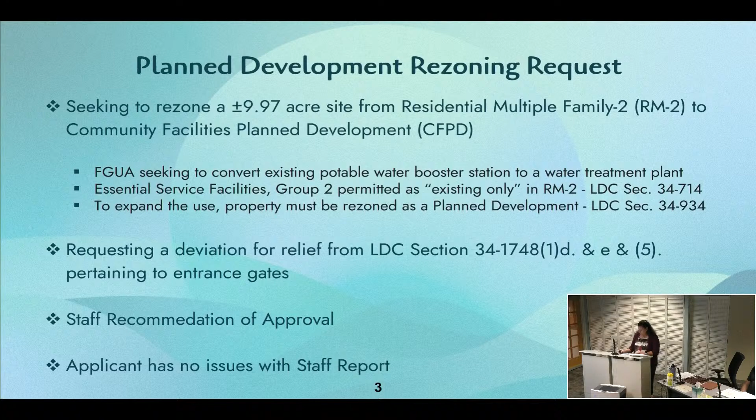A little bit of background on the applicant: the Florida Governmental Utility Authority is a special taxing district formed in 1999. Its purpose is to acquire, own, improve, and operate water and wastewater utilities. There are currently over 120,000 customers throughout 98 systems in 14 Florida counties.

Lehigh Acres is one of those service districts. It's about 95 square miles with a total of 14,000 water customers, servicing basically 50% of the area. Water treatment plant number 1, at 305 Coolidge Avenue, is the only water supply source at this time. The subject site at 913 Bolivia Drive would be water treatment plant number 2, which currently serves as a booster station and water storage facility. Over the last decade, Lee County has grown significantly, and now the FGUA must expand its water supply system to meet current needs and future 20-year demands. In addition, there are water system reliability and resiliency issues that need to be addressed with the existing water facilities.

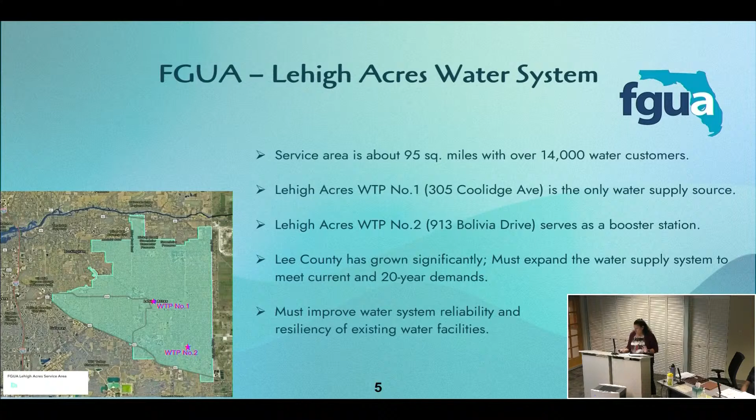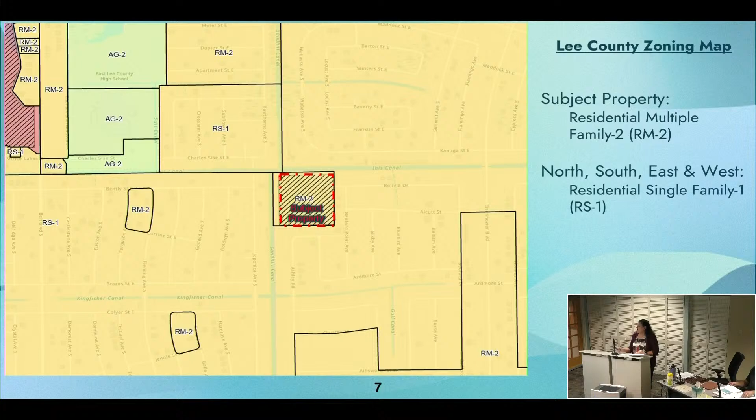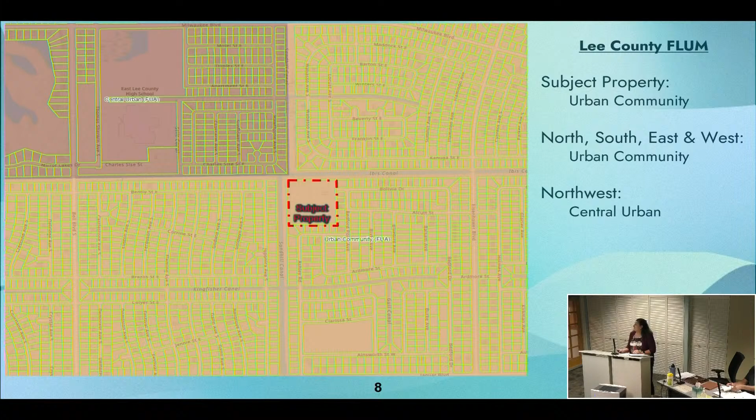This is the property, at 913 Bolivia Drive. It's just under 10 acres, located at the western terminus of Bolivia Drive, about 3 miles north of State Road 82, in the southeast section of the Lehigh Acres Planning Community near the Lee County and Hendry County border. It is currently zoned Residential Multifamily 2, and you can see all around it is RS1 on all sides. That's the current zoning, and this is the current future land use map designation. It's within Urban Community, surrounded by Urban Community on all sides, except on the northwest where it is Central Urban.

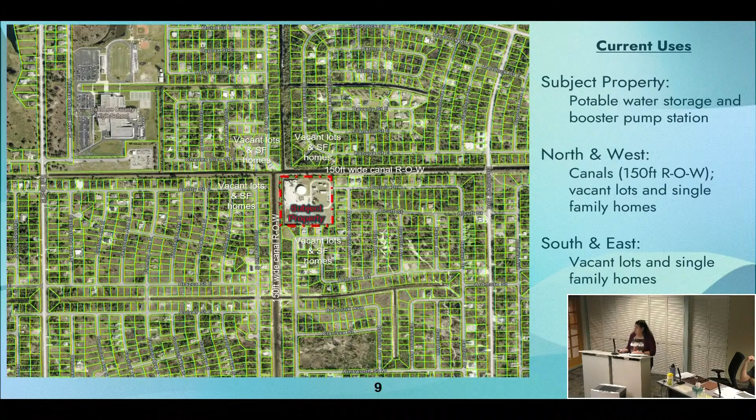As I mentioned, the subject property is currently being used as a water storage and booster pump station. To the north and west are 150-foot canals, the Ibis Canal and the Sandhill Canal. To the east and south are vacant lots with a few single-family homes on them.

A little bit of history on the site: it was originally purchased in 2002 by Florida Water Services Corp. In 2003, a special exception was approved to allow for Essential Service Facilities Group 2 in the RM2, and conditions were attached to that approval. It was for a special exception for the water treatment plant only, which had to be developed according to the site plan. There's a buffer that was required: a 30-foot wide Type F landscape buffer on the north and the west, and a 25-foot wide Type E buffer on both the south and the east, abutting the residential. They were to preserve the existing native trees outside those impact areas, remove exotics, and maintain them.

No structure other than walls could be located within 100 feet of the boundary, excluding the wells. All structures had to be painted natural colors, and there were lighting standards. If the use was discontinued for more than 5 years, the special exception would become void. So with that...

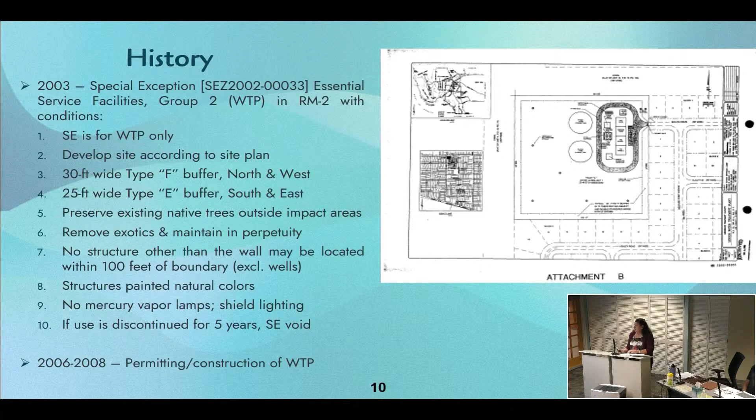Next page: FGUA purchased the lot in 2003 and was issued a development order to drill 3 shallow upper sandstone aquifer wells. Between 2006 and 2008, permitting and construction began for the water treatment plant. In 2008, they had some water quality issues and sought a special exception to include a deep injection well to improve water quality, along with a variance to allow that deep injection well within 50 feet of the perimeter of the property instead of the required 100 feet.

Again, there are conditions associated with this: complying with the existing special exception approval, developing according to the site plan, going through the deep injection well permitting process, and addressing any impacted slash pines. At that point in 2013, the deep injection well was not constructed, and due to financial constraints, the site was converted to a water booster station and water storage facility.

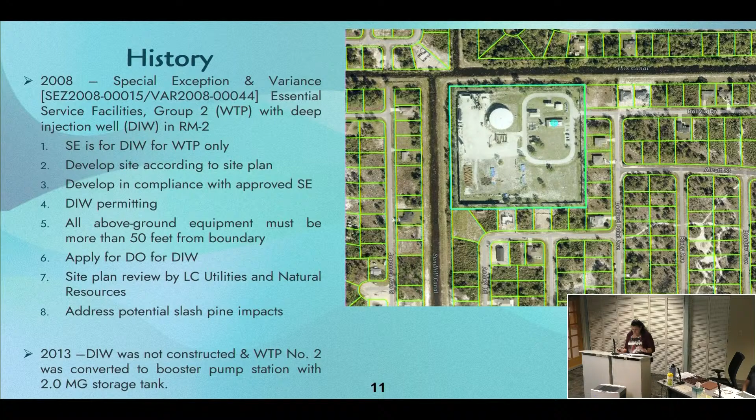That brings us to current needs. The FGUA has done a needs analysis for the water system, and based on population and water demand projections, it justifies an expansion and improvement of the existing water treatment storage facility. Their water master plan seeks to reestablish water treatment plant number 2 as a reverse osmosis system with a deep injection well and monitoring well, add administrative offices, infrastructure, piping, and raw water wells. They received some funding for that expansion from the state.

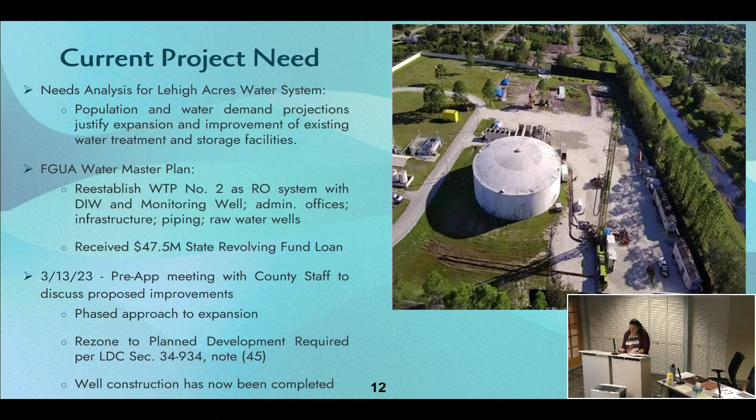In March of 2023, a pre-application meeting was held with county staff to discuss the proposed improvements, and it was determined that they needed to go through a rezoning to get the planned development district designation to do the water treatment plant. One more thing: well construction. The deep injection well has now actually been constructed, due to concurrent rezoning and development orders allowed by the land development code. It has been constructed, and they're going through testing, monitoring, and inspections now.

All right, so this is the master concept plan. There's a large version of it in your packet. The blue areas that I've highlighted are the existing areas of development, which include the booster pump station and all the equipment that had been vacated for the water treatment plant that was never fully established.

The pink would be phase 2, or the short-term proposed improvement areas, which would include recommissioning of the water treatment plant, conversion to the reverse osmosis system, some new Upper Floridan aquifer raw wells, which go deeper than the sandstone ones currently on site, and administrative offices. Phase 3 includes longer-term improvements to increase water treatment and storage capacity up to between 8 and 10 million gallons per day.

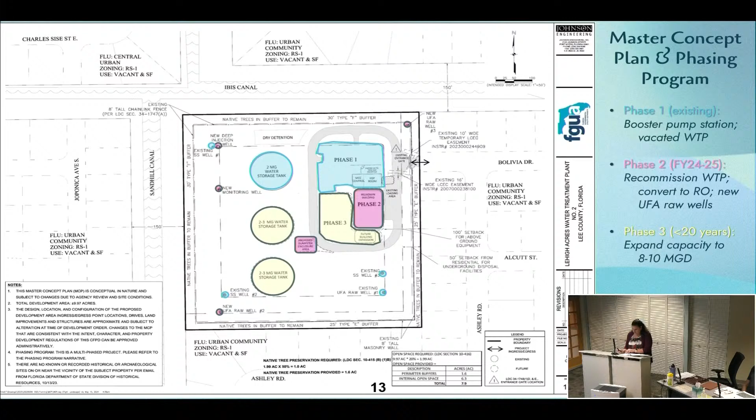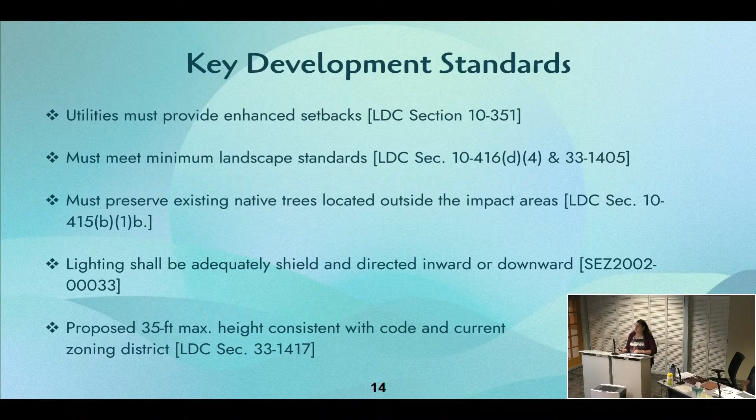This slide summarizes the key development standards regarding setbacks, landscape standards, tree preservation, lighting, and height. As you can see, these either meet Land Development Code standards or are conditioned based on prior approvals, and there's no intent to abandon those.

This shows the enhanced setbacks that are already established on the property and will still be maintained. There's a 50-foot setback requirement from residential for any underground disposal, and a 100-foot setback for any above-ground equipment.

Buffers -- yes? What is underground disposal? That would be the deep injection well, where the brine pulled out of the RO system would be put back into the underground levels of the earth.

I thought the deep injection well was in the northwest corner. It is. That's the setback requirement from the code. It's confusing because it's already set back. It's already set back way more than -- yeah, exactly. You can see it up on the top; it says new deep injection well at the top northwest corner there. Is there going to be a second deep injection well? No. All the red indicates is what the code says today, and that we are complying with it.

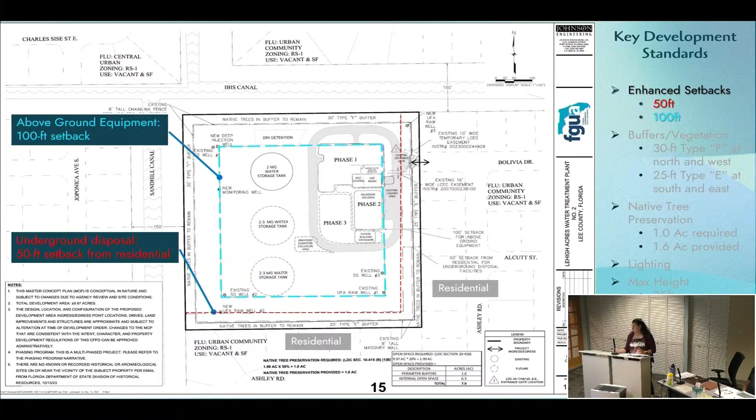This indicates the type F buffers, the 30-foot type F buffers on the north and the west, and the type E, 25-foot buffers at the south and the east. With this, an 8-foot wall was constructed on the south and east sides of the property. On the north and west is an 8-foot chain link security fence.

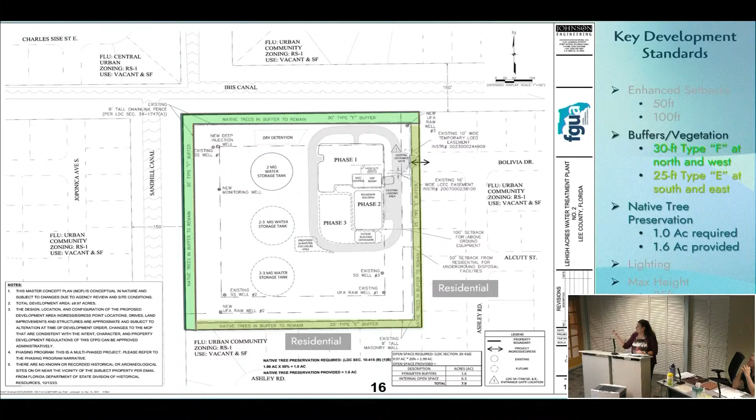Let me go back one more time -- those native trees are outside in those areas, and those exceed the requirements. Then lighting and maximum height of 35 feet: the storage tanks are the tallest structures on the site, and they're less than 35 feet. Future storage tanks that would be proposed would also be that low profile, less than 35 feet as well.

All right, so this is the deviation request. As I mentioned, that existing 8-foot wall and entrance gate is located right there at the terminus of Bolivia Drive. That was built before the code changed and has additional requirements.

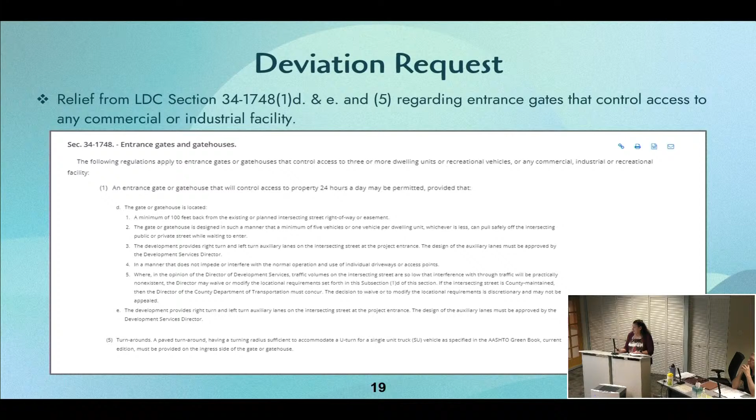Here's what those requirements are. The code requires a 100-foot setback from the right-of-way. The existing gate is 20 feet from the right-of-way. The gate should be designed for a minimum of 5 vehicles stacking, and as you can see, that's not really possible. It also calls for right and left auxiliary lanes, which the Director of Development Services can waive or modify based on low traffic volumes, and then a turnaround for a single truck is also required on the ingress side of the gate.

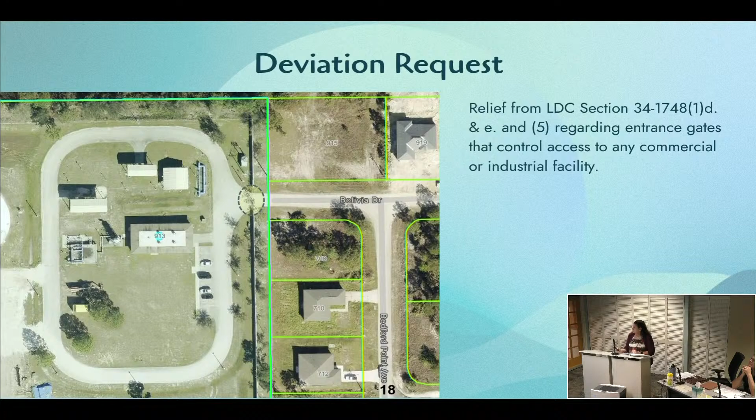So you can see it's only 20 feet from the property line. This is the existing conditions. They're not looking to change anything now, so this would be a deviation request. So they're seeking to reduce that 100-foot minimum distance to 20 feet to kind of acknowledge what's already on the ground today and continue on.

Eliminate that auxiliary lane provision based on low traffic volumes and eliminating the turnaround requirement. Right now, the only things that come in there are the people who have intention to come in there to either work inside the facility, equipment and such.

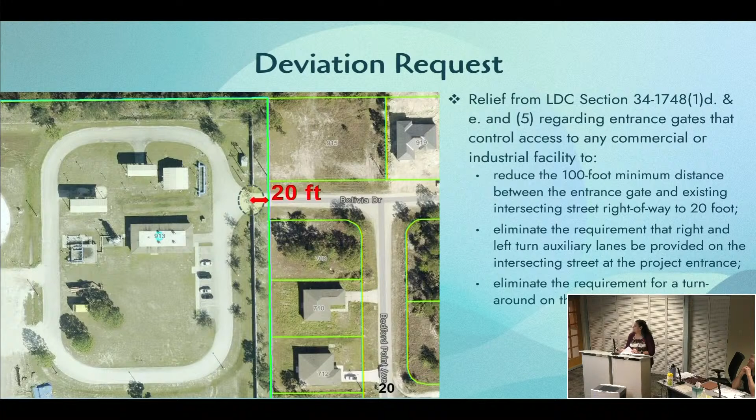And the justification, the existing site plan, the existing site design layout does not offer enough space to include these items now. And as the use generates minimal traffic and is at the terminus of Bolivia Drive, the requirements should not be needed.

The staff report indicates that staff is in support of the deviation request.

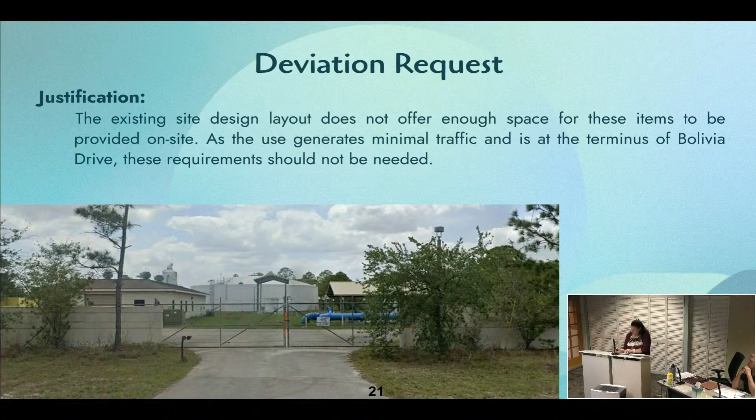And then moving into Lee Plan consistency. So we agree with staff's assessment on the applicable Lee Plan objectives and policies, and I've highlighted a few of those here. The county's vision statement states that public facilities will be maintained at adequate levels of service, partly by the construction of new facilities and partly by the use of new methods to conserve the capacity of existing facilities. This rezoning effort supports the expansion of existing public facilities to maintain adequate levels of service.

The land use category, urban, community, public and quasi-public uses are included in the list of predominant land uses for this category. It also calls for expanding and strengthening them accordingly. This rezoning promotes the expansion and strengthening of public services. Policy 2.1.3 establishes that public utilities and facilities are allowed in all land use categories when it's consistent with the GOPs and the applicable land development regulations.

And the rezoning is consistent with Policy 5.1.5 as the conditions that are attached to the site previously through the special exception approval ensure compatibility with the surrounding neighborhood.

Moving into Objective 7.1, because of the nature of the type of use that this is, it would be classified or considered industrial. The proposed improvements will comply with local, state, and federal air, water, and noise pollution standards. And although it is located next to residential development, neither the existing facility nor the proposed improvements are anticipated to generate noise levels incompatible with residential development, nor will any bulk storage or production of toxic, explosive, or hazardous materials be near residential areas. All permitting will be done in accordance with South Florida Water Management District and Lee County Development Services and would be consistent with good engineering practices, adopted environmental criteria standards, and relevant policies of the Lee Plan.

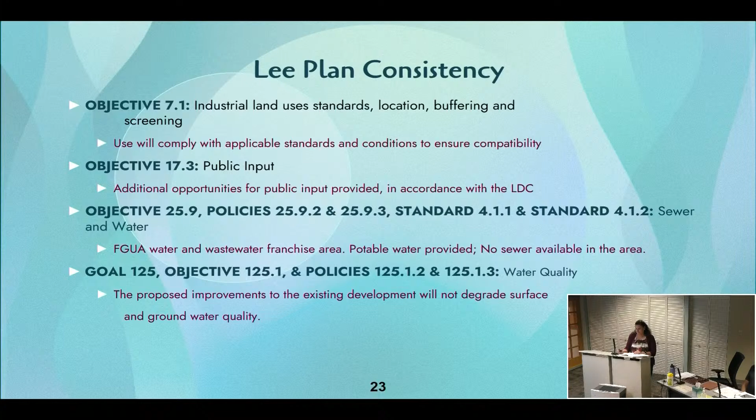All right, so then we come to the zoning criteria. In summary, as we've demonstrated, the proposed Community Facility Planned Development rezoning request will meet the criteria established in Land Development Code section 34-145 D4A for granting a rezoning, including complying with the Lee Plan and being served by existing urban services. The request meets or exceeds all performance and dimensional standards of the LDC and other applicable county regulations, with the exception of the deviation, but promotes the intent of the code regarding protection of health, safety, and general welfare of the public.

Is there a proposed limitation on the square footage of the administrative offices? I don't believe that we put a limitation on the square footage of the office in the conditions.

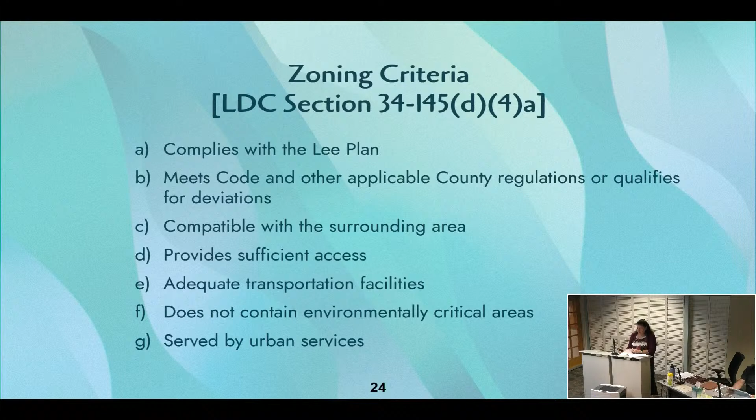The property will continue to be accessed via Bolivia Drive, as demonstrated in the provided traffic impact statement that was part of the application package. The surrounding roadway network has sufficient capacity to handle traffic from the proposed development. The site is already developed and does not contain any environmentally critical areas. Proposed improvements will protect existing environmentally critical areas and natural resources. The site is served by urban services and will enhance the availability of urban services to the surrounding facility based on the type of use that it offers.

The planned development findings: in addition, the proposed CFPD rezoning request meets the planned development findings criteria. The proposed permitted uses allow for the development of public facilities that provide necessary essential services to the surrounding community. It doesn't generate significant traffic, create adverse impacts regarding noise, lights, or odor, and is generally consistent with the surrounding area, particularly with the conditions placed on it—the wall, the landscaping, and setbacks. As previously mentioned, those conditions were imposed on the site and would continue to be applicable. The deviation enhances the achievement of the objectives of the PD and protects the public health, safety, and welfare.

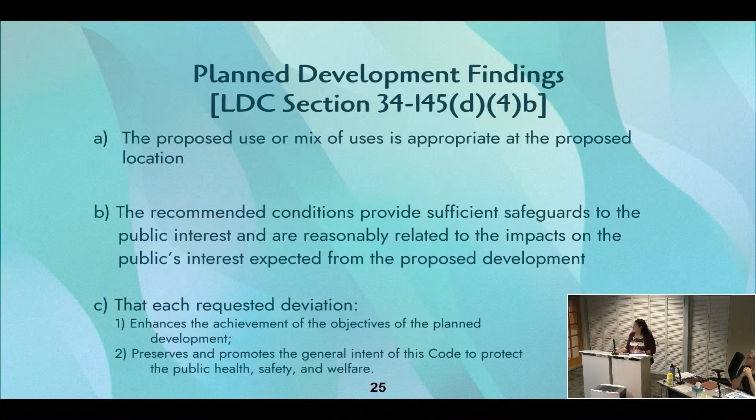Regarding public notice, I mentioned that we had a public information meeting, and that information was available in the packet as well. Signs were set up on September 16th in accordance with the administrative code sections, and I know that county staff had mailed notices to the surrounding property owners.

So in my expert opinion, the requested zoning change on the subject site from RM2 to Community Facilities Planned Development, to allow the recommission of a water treatment facility and associated uses, is appropriate in this location. It allows for the expansion of the public purpose use, supports the goals, objectives, and policies of the Lee Plan, complies with the Land Development Code criteria, and meets the applicable standards required under Chapter 33 regarding development within the Lehigh Acres planning community. The applicant and I are available to answer any questions you might have.

Thank you. I don't have any questions at the moment. I'm ready for staff's presentation.

Thank you. The PowerPoint, paper PowerPoint, will be staff exhibit 2.

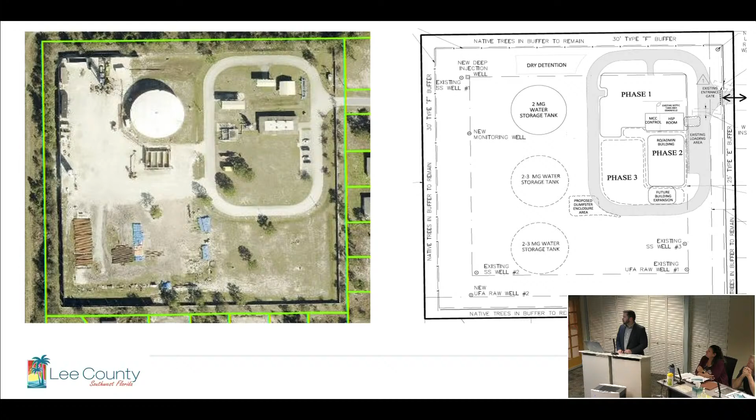The applicant has gone through the zoning history up to this point, but since 2013, this has been used as a water booster station and not as its own water treatment plant. And that's part of the reason why they weren't able to benefit from that existing only clause in the RM2 district that they were discussing, that has a defined set of dates, basically, that you have to be in existence.

I don't think they would have met the original date. I believe it's 1989 or something, that you would be able to expand as a conforming use. But even with that, the special exception expired with inactivity for 5 years, I believe is what the applicant stated. So that's why they're having to go through this case today.

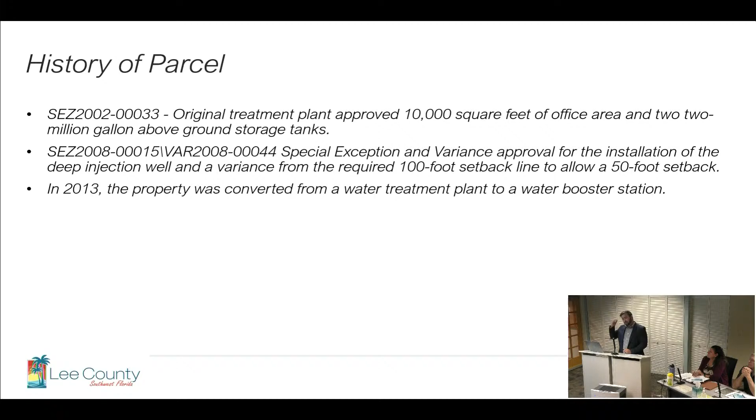The applicant has gone through the decision-making criteria, and we'll hit some of the high points through our presentation, but we do generally find that they're consistent with the decision-making criteria.

This is in the urban community future land use category, between what's already characterized as an area that would support public and quasi-public facilities. Policy 2.1.3 also expands where these utilities can be located, and so we find them consistent with the future land use category.

The proposed expansion and reinvigoration of this site is also there to facilitate objectives 2.1 and 2.2, allowing for additional urban services in the area that aren't currently available or not able to sufficiently address the growth in the area.

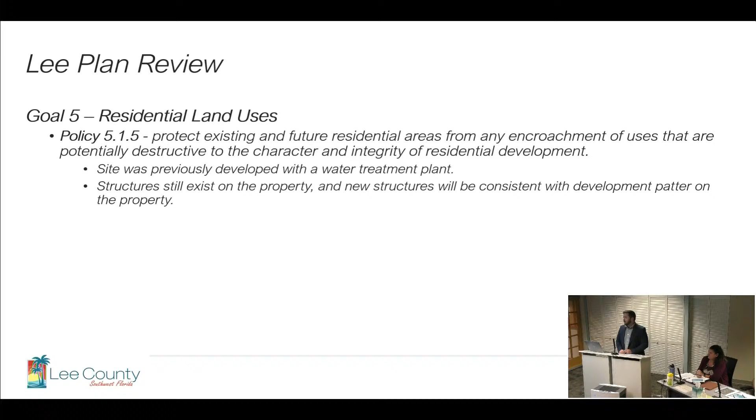Staff finds that this is consistent with policy 5.1.5 simply because most of the structures are already there. The development's already there. From the outside, property owners adjacent to the property will see very minimal impacts other than, when they go through the development order process, having to bring some of that landscaping back into compliance if there is any non-compliant landscaping there today, plus a few additional structures on site. So we do find it consistent with policy 5.1.5.

25.9.3 of the Lehigh Acres Community Plan speaks to working with FGUA to provide priority areas for the expansion of utilities. While this is not necessarily creating a prioritization with this site, this is allowing for additional expansion in the area and additional capacity, and so we do find them consistent with this policy as well.

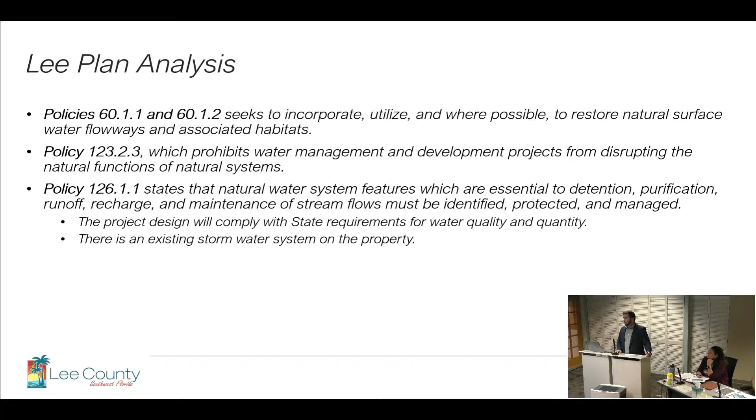Just speaking briefly on water quality, there is an existing water management plan already in place on the site. They will be utilizing much of that with their new reinvigoration of the site and expansion, and they will be required to comply with state requirements for water quality and quantity.

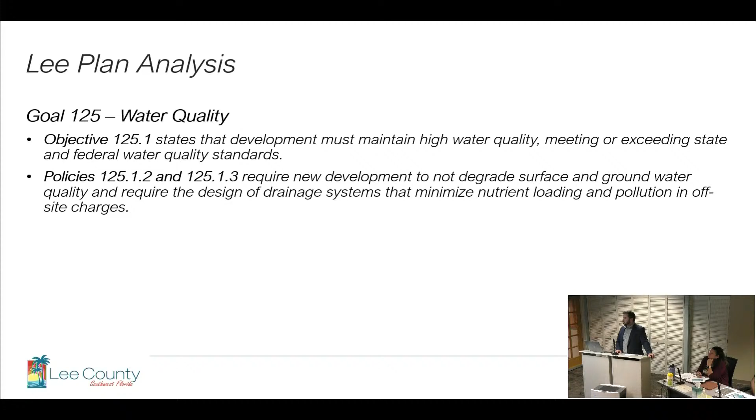And this is, once again, just a reiteration of more on that water quality, that they have to meet high standards for water quality in the area, and we do find the project will meet that.

Just going back to 10.351, there are some additional requirements that the applicant was required to meet. They have met most of those. I did want to just bring up, one of the requirements was for odor or other impacts to health, safety, welfare.

Fortunately, a water treatment plant doesn't generate the odor that a water reclamation facility would. And so this doesn't have the baggage like a wastewater treatment plant would typically have. But additionally, they do comply with the rest of these requirements.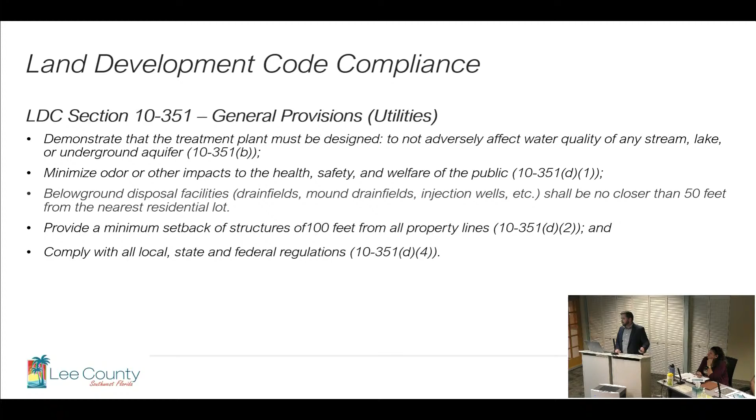The applicant's already brought up the lines that kind of hash out the structure setbacks, and then that deep injection well line there away from residential areas.

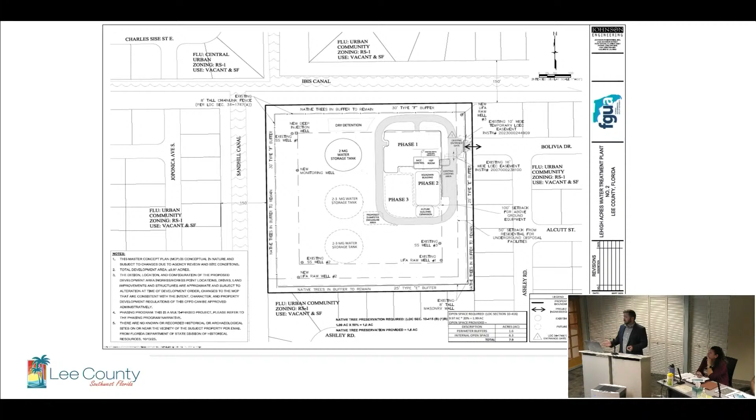And then that one deviation, the applicant's already gone through, but it is an existing gate. The wall and the fences and the gates aren't proposed to change because all this has already been well established in the area, and we were in agreement that this did merit approval of a deviation just because the site is exactly as it is, and will, from an outside looking in, operate in the same way moving forward. And so we did recommend approval of the deviation for that.

With that, we are recommending approval with the conditions in attachment C, and staff is here with any questions you may have. Okay, thank you.

I don't have any questions. I think this is a straightforward application. Thank you for the detailed presentation and staff report. And I'll be preparing a recommendation, and you can expect a final board hearing to follow. Thank you. Thank you.